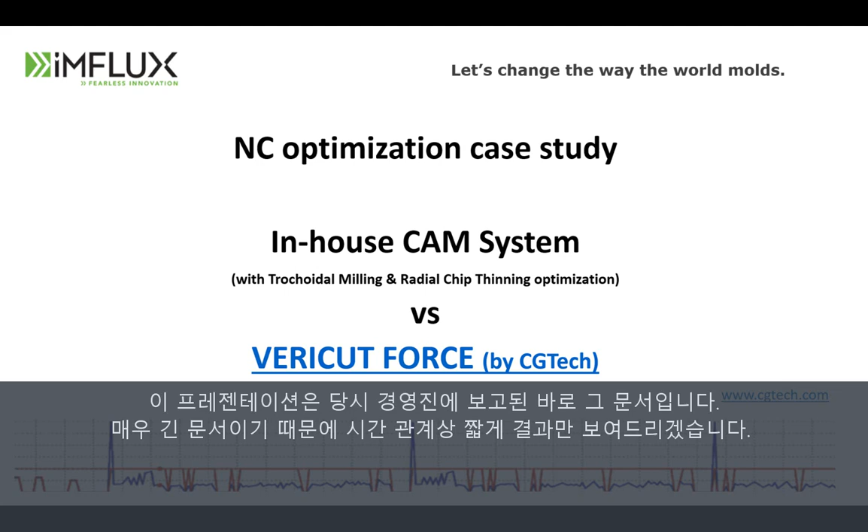As part of that, we open up a Force license, and we keep it open for several days afterwards so that somebody can practice with it. This NC programmer took that as an opportunity to go back to the shop and optimize several of their jobs. And this is the actual presentation that he used to show management the results he achieved. That's why it doesn't follow the template that we were asked to use for these presentations.

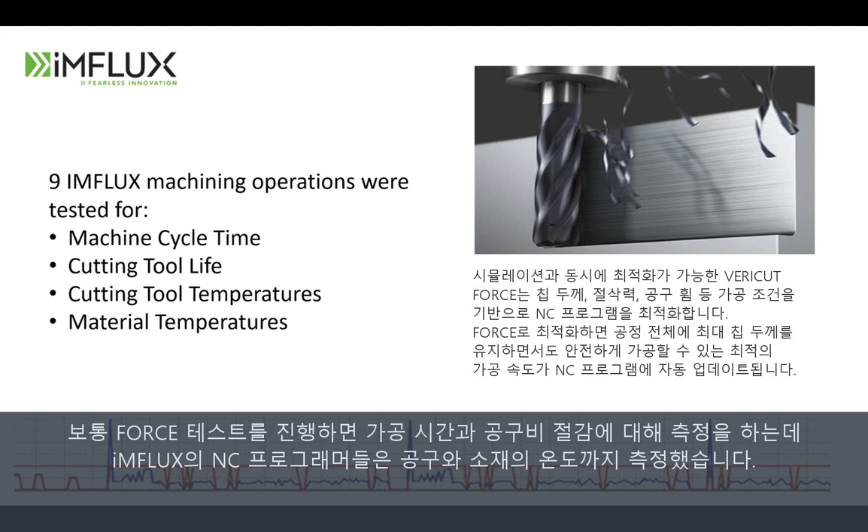One thing I want to point out: we always focus on cycle time and tool life. This NC programmer also focused on the cutting tool temperature and the material temperatures, and that I thought was pretty insightful. Jumping into the results, this was the first program that he decided to tackle. You can see that he had a cycle time reduction of 37%. And already the machinist was commenting that the toolpath was awesome.

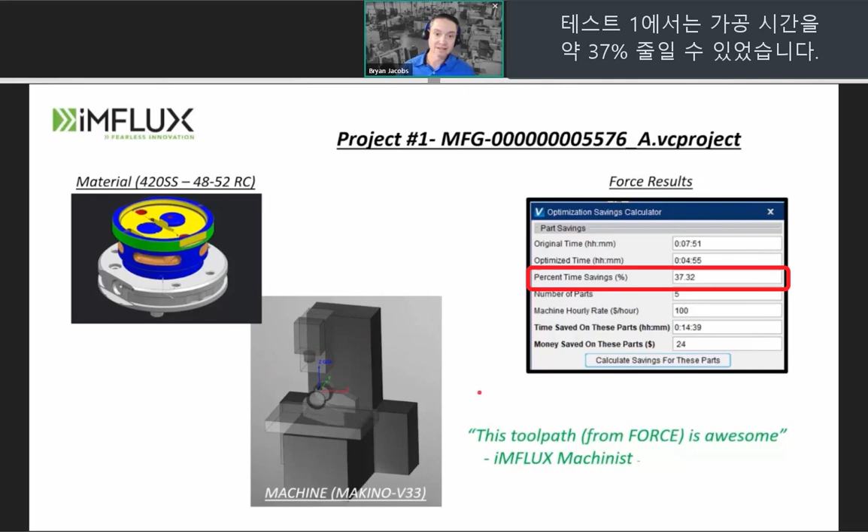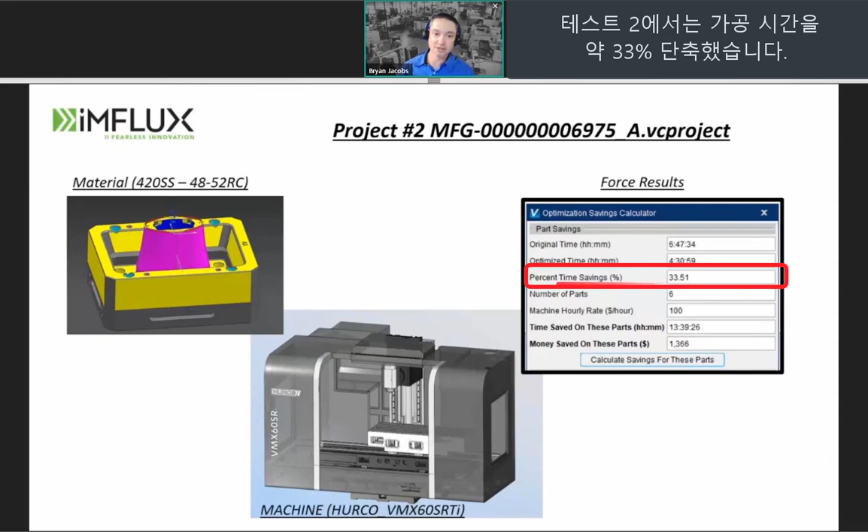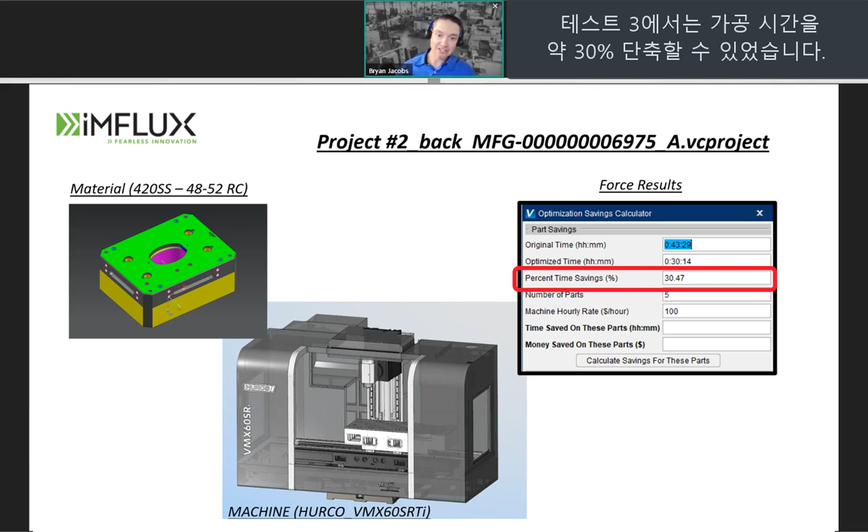Second job he did, and this presentation was very long. I trimmed it down to just a handful of slides in the interest of time. On the second job, 33% cycle time reduction. Third job, again, this is a mold and die shop, 30% cycle time reduction. So he was getting some pretty good results right out of the gate after going through training. Did a hard mill test and saw a 51% reduction in cycle time.

I thought this quote from the machinist was really interesting: this was the best sounding roughing cut I've ever heard in our shop. Back when we used to do live cutting demonstrations, that was the #1 comment I would hear, how different the machine sounds when it's optimized versus not optimized. The non-optimized job would be going rah, rah, and the optimized job would sound like you were just cutting butter. It was just vroom, vroom. So it really stood out.

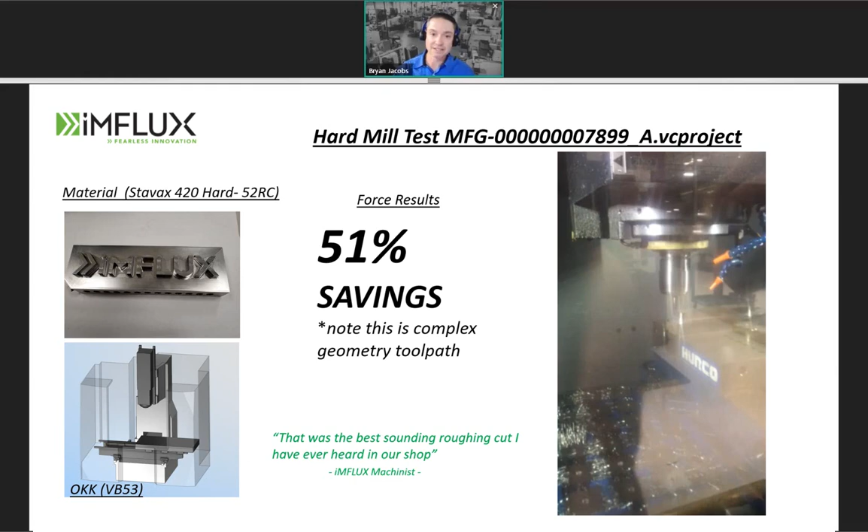This was another test that he did where he used the internal CAM optimization and saved about 30 minutes of cycle time, and then took the radial chip thinning optimized file and optimized it with Force and saved another 30 minutes. But more importantly, there was this massive spike in forces identified in the program that had been optimized with the radial chip thinning optimization. Force automatically saw that spike, pulled all the feed rates down during that time, and so nothing bad happened.

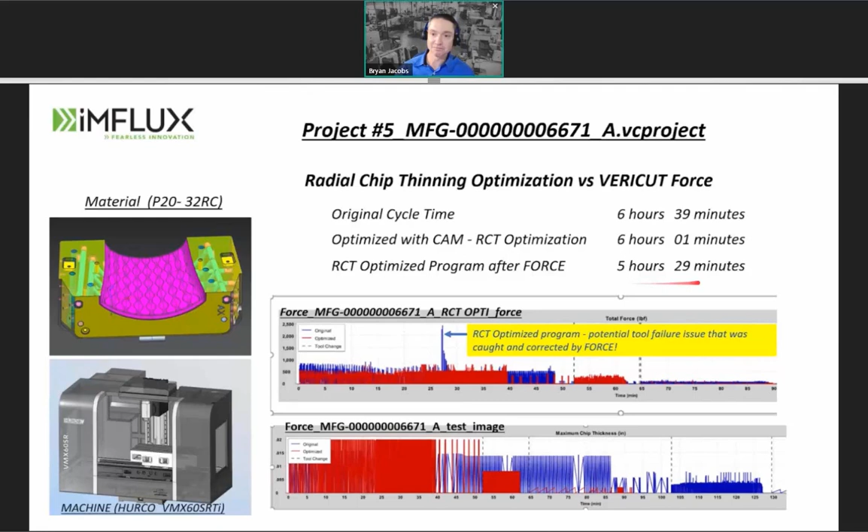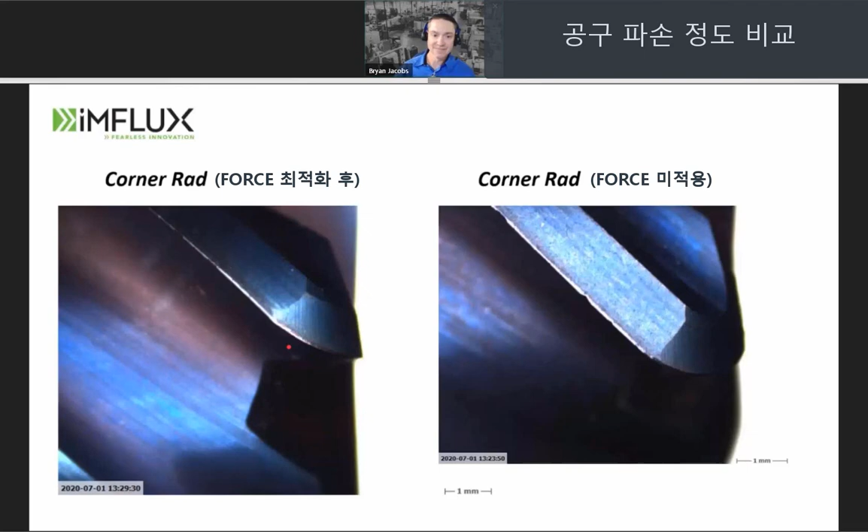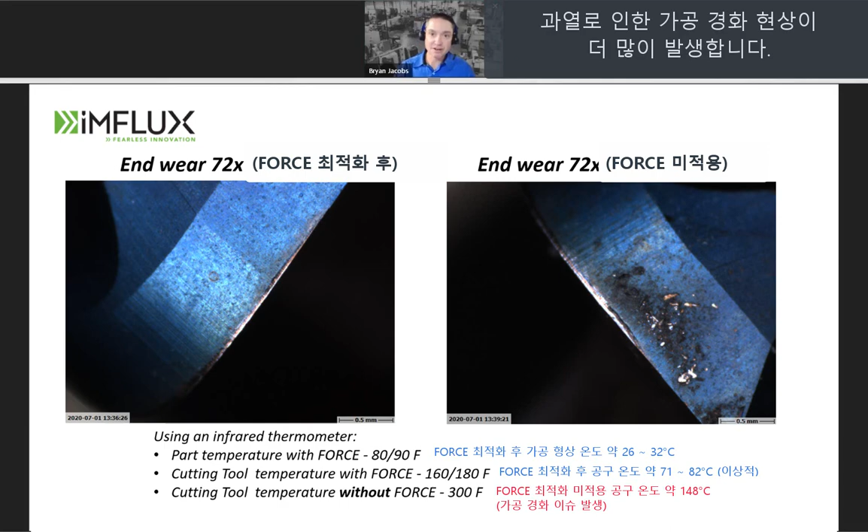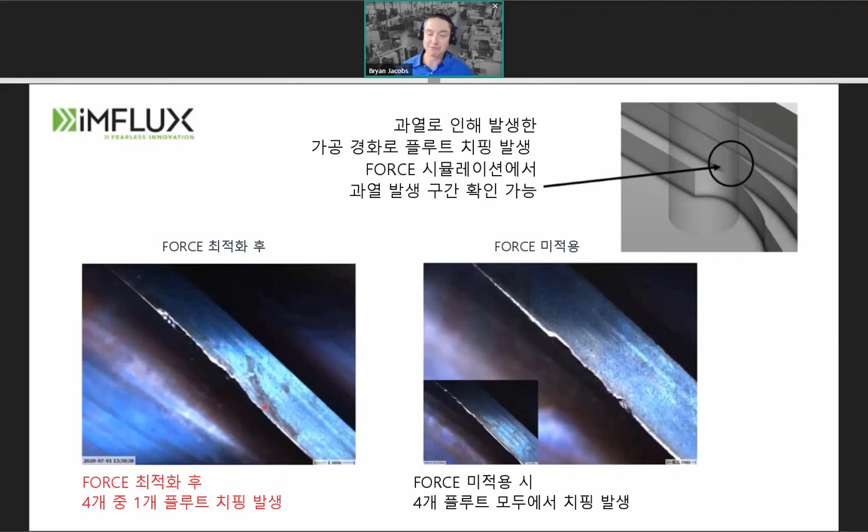They were looking at the cutting tool temperatures, and with the optimized file, it was 160 to 180 degrees, which they considered ideal, but without it, the cutting tool was getting up to over 300 degrees. That work hardening issue ended up chipping all 4 flutes of the tool that was not optimized, and they only could find 1 flute that was chipped with the optimized version. In the simulation, they were able to go back and find exactly where that work hardening situation was being created.

So this was their summary presented to management. Overall, 17 to 45% cycle time reduction, greatly improved tool life, reduced thermal growth. Again, just the fact that they were monitoring temperatures was pretty cool. Improved surface finish and increased operator confidence. And the operator confidence one is another one that I don't think people think about all that much.

When I've talked with existing customers about optimizing their jobs, they're like, we can't really do that because the operators are constantly changing our feed rates. They don't trust us to set the right feed rates to begin with, so they're constantly modifying them. And I think this is an opportunity to build that trust between the NC programmers and the machinists.

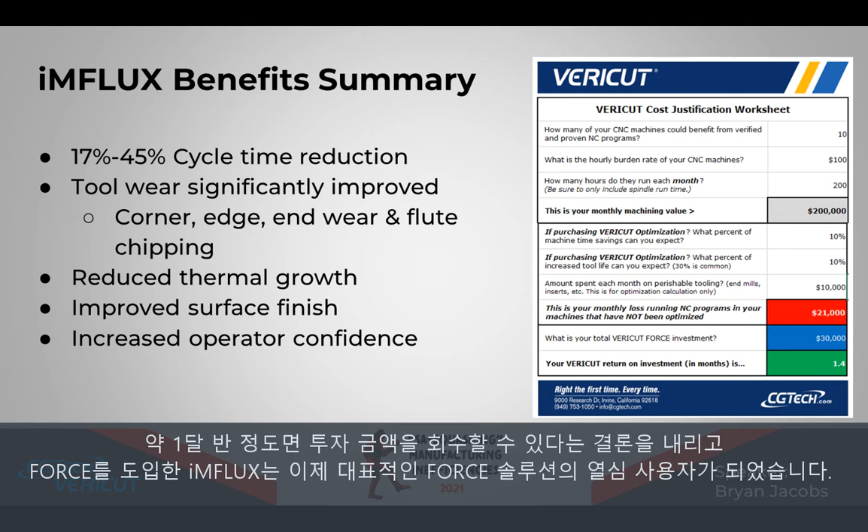This was the actual Vericut cost justification worksheet that they used to justify the purchase, and just skipping down to the bottom, the ROI was determined to be about 1.4 months. So they did end up, they are now active Force users at that shop.